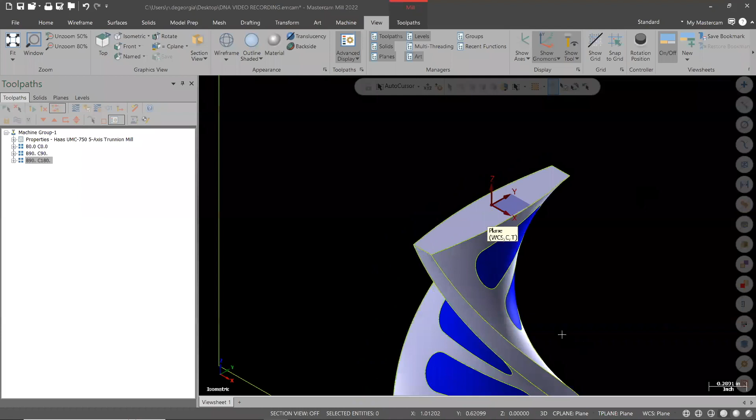Hey everyone, this video will be the last of the DNA Strand series. To do my multi-axis toolpath, I'm going to be using Unified. But first, I need to create a solid to use the clean core machining method.

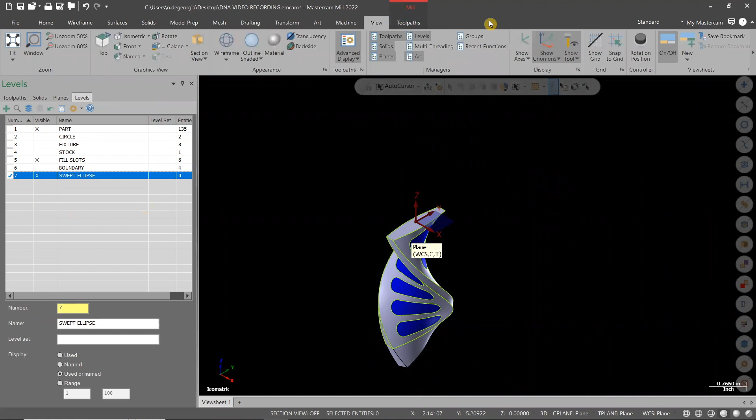To create the solid, I'm going to go into wireframe and create an elliptical on the top face. I'll have to go into wireframe, then under the rectangle tab and click on elliptical.

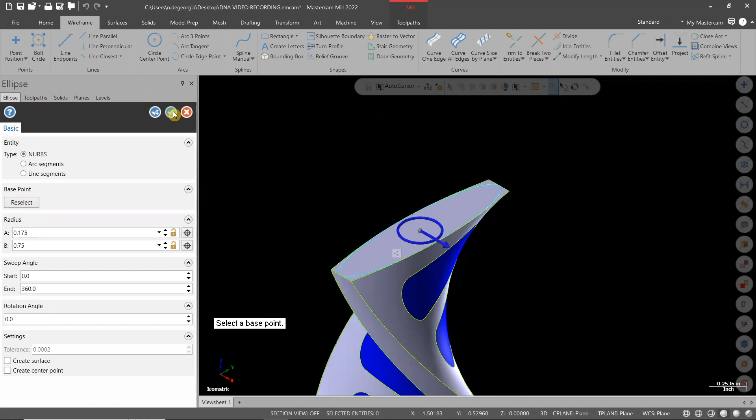Once my geometry is created, I will go under the solids tab and select sweep. I will chain the elliptical that I just created, and then I will chain the center line going down the model. That will be my along chain. And then for my guide chain, I will select a side of the model.

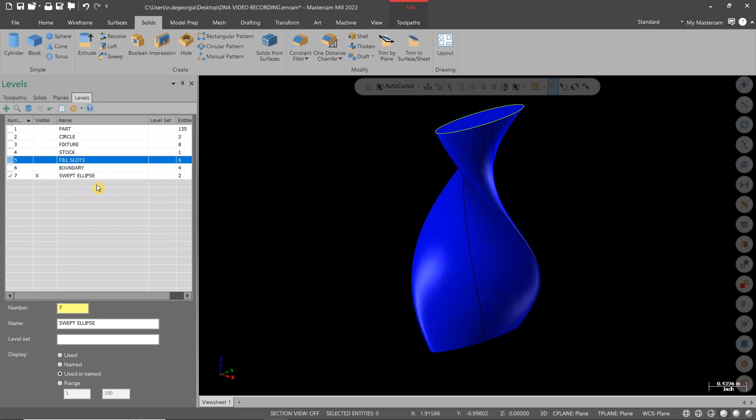Now that I have a solid for the clean core machining method, I can get into my unified toolpath. Before I do that though, I will make my stock model. I will name it the results of B90 C180 and then make sure all my source operations are clicked from my previous cutting paths.

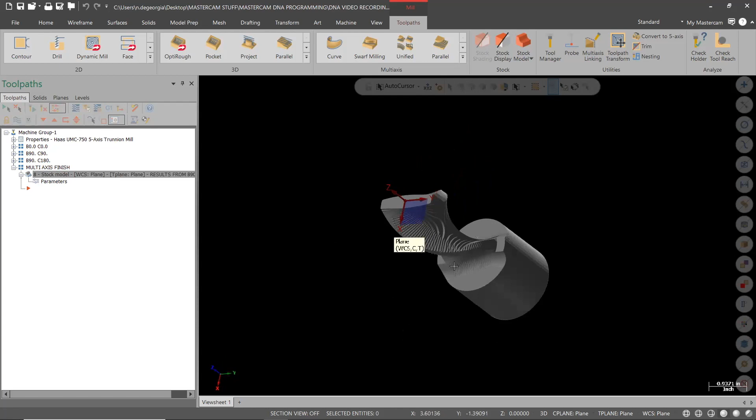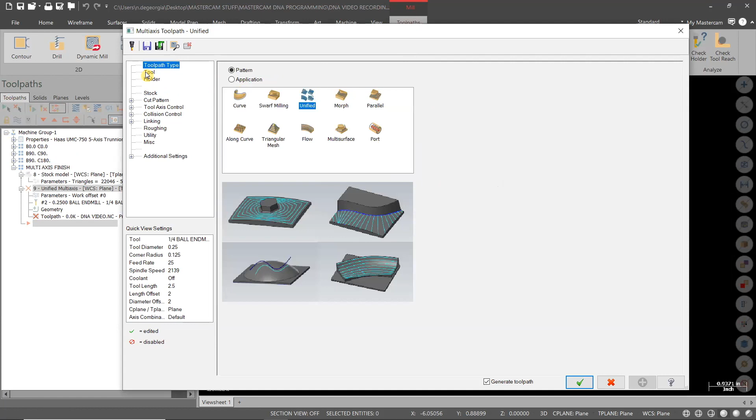Once I confirm that my stock model looks accurate, I can get into the Unified toolpath. I'm going to select Unified and then select my tool, which will be a 1/4 inch ball end mill. My cut pattern will be plane and custom angles. I will select the geometry, which will be the solid that I just made from the elliptical sweep.

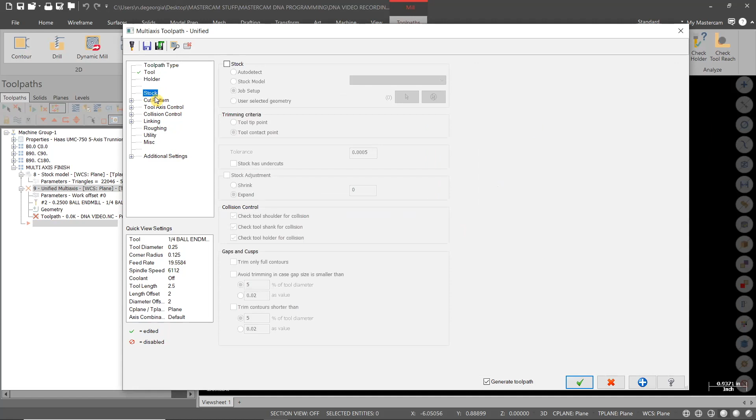I will select full start and end at the exact location, turn on extend and trim, start point and spiral. I will then adjust my step over for a scallop height of 5/10. Now you can change this number, but your machining time will take longer.

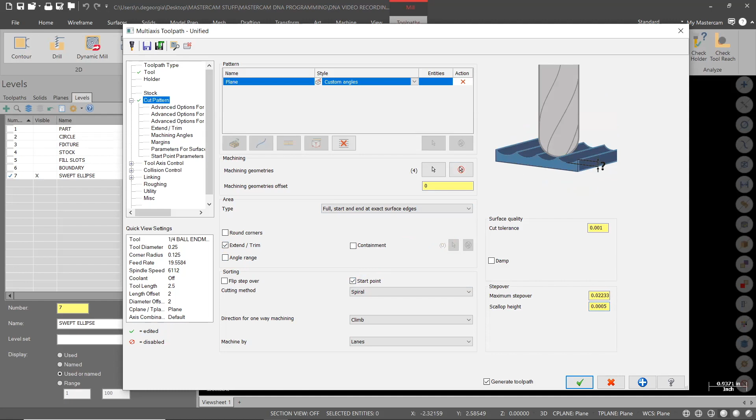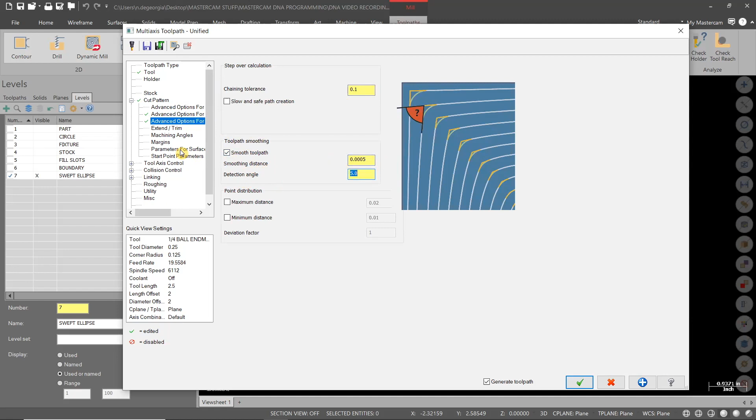Moving on from my cut pattern, I will move to advanced options for spiral machining. I will perform spiral in full and make sure that first contour and last contour are selected. Then, under my advanced options for surface quality, I want to hit smooth toolpath with a smoothing distance of 5 ten-thousandths. Extend and trim: the side extensions should be on with a value of 1/4 inch.

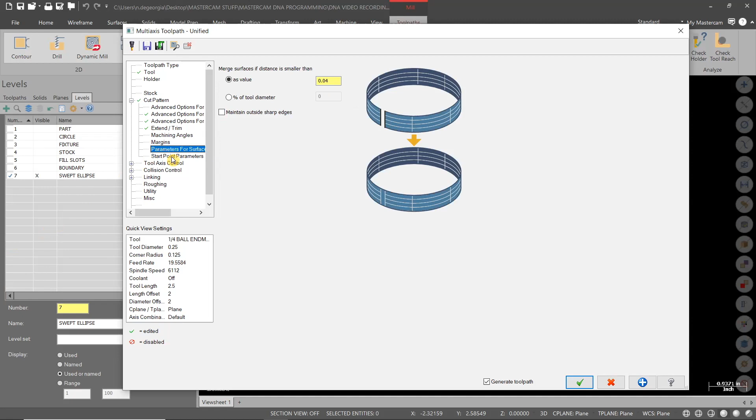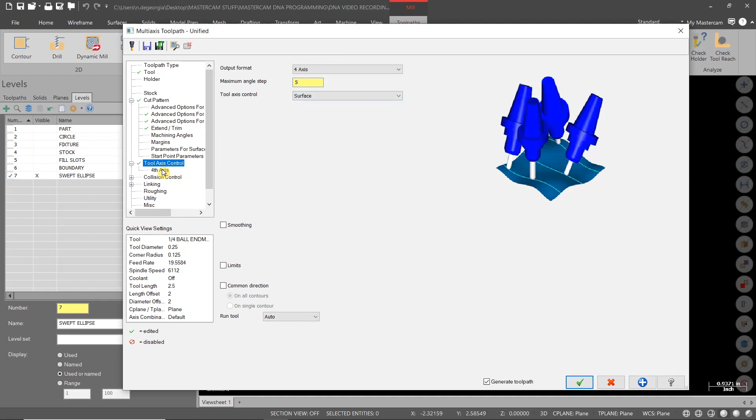And then I'm going to move down to the tool axis control. Now under my tool axis control, I want to do an output format of 4th axis, with a maximum angle step of 5, and change my tool axis control to surface. Then after, I will select 4th axis in the direction of Z axis. And I'm going to lock the 5th axis at 20 degrees.

Following up after tool axis control will be my collision control. I want to make sure that my flute is checked, then change my strategy to retract tool along tool axis. And I'm going to select avoid geometries on the right hand side of the box, and I'm going to select the model and the slots that I created.

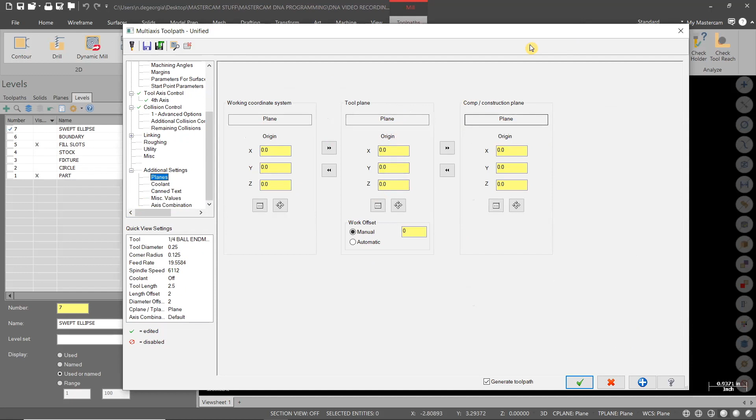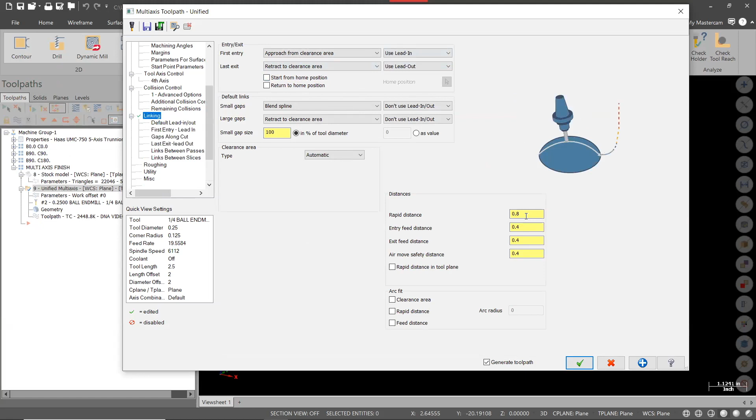After checking my tool path, I'm going to go into my linking, and I'm going to use lead in and lead out for the entry and exit. I'm going to turn on plane for clearance area and adjust the heights to 2. And then for my distances on the right hand side, I'm going to change my rapid to 1, 1/2 inch for entry feed and exit feed distances, and then an air move safety distance to 1 inch.

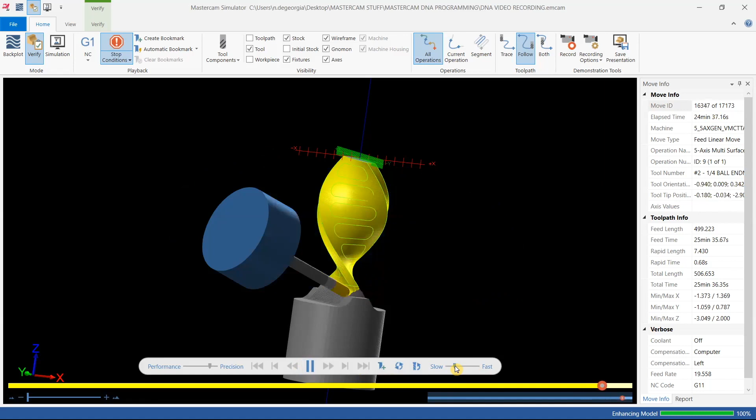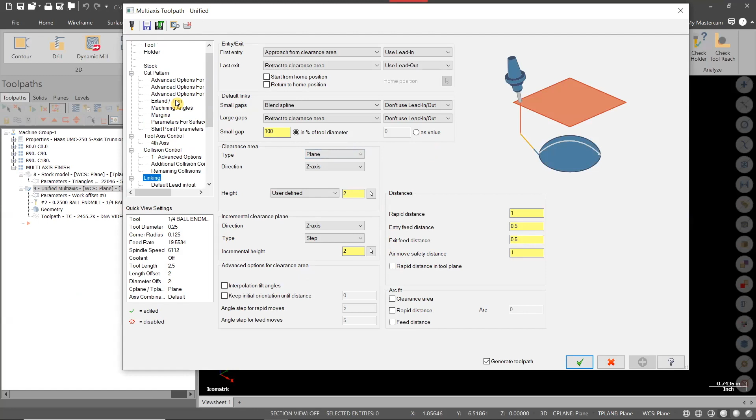After watching my simulation, I didn't like how at the bottom of the tool path it hit some of the roughed out material. I'm going to go back and change my side extensions, and then I'll run my simulation again under backplot and verify that everything looks good.

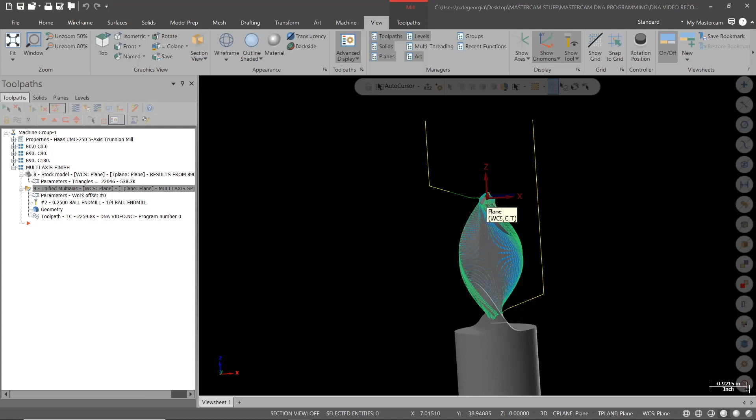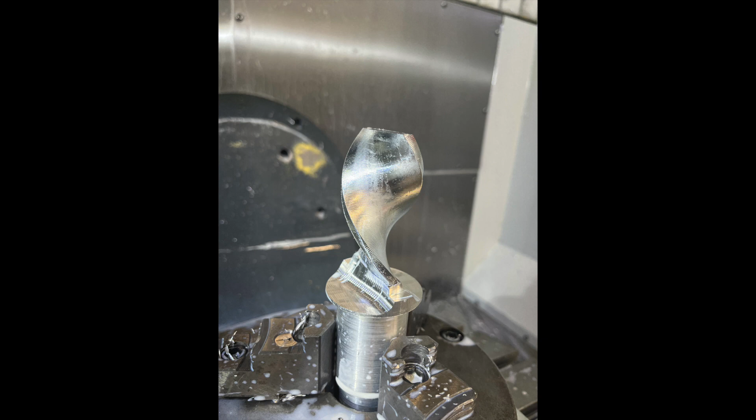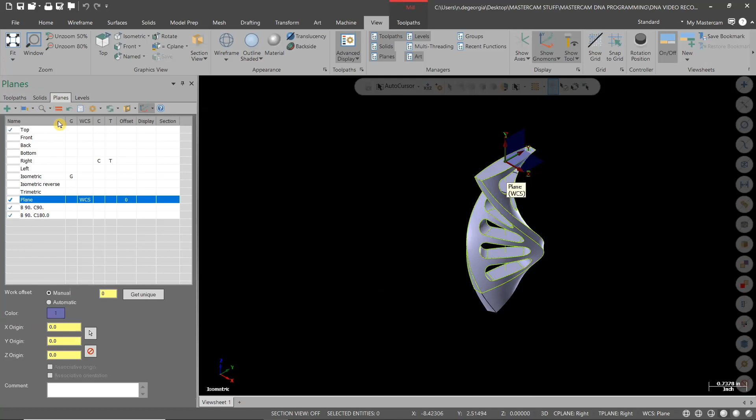Moving forward with the last operations of completing this part, I'm going to be setting up to do the slots. From here, I'm going to create a plane, and I'm going to use dynamic with geometry. First, I'm going to rotate my workpiece to the B90 C180 view, and then I'm going to select the walls of each slot. I'm going to select towards the top of the slot, so I can choose the top of the DNA strand. And then from there, I'm going to create my plane.

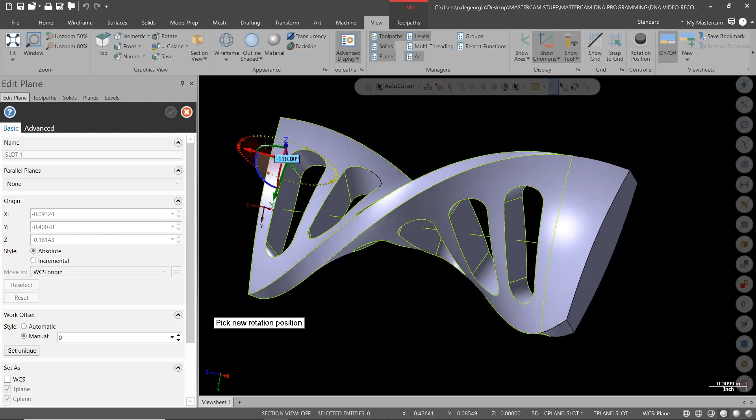Now the reason we want to use these two walls of the slot and we're creating a plane from geometry is because we need these walls to be parallel when the machining is happening. So when we select the walls, we want to choose towards the top of the geometry. And this way we can chain the top of the geometry for our cutting path.

It's also important that we go back in and edit our slot plane work coordinate system, because we want to rotate the Z to be vertical 90 degrees.

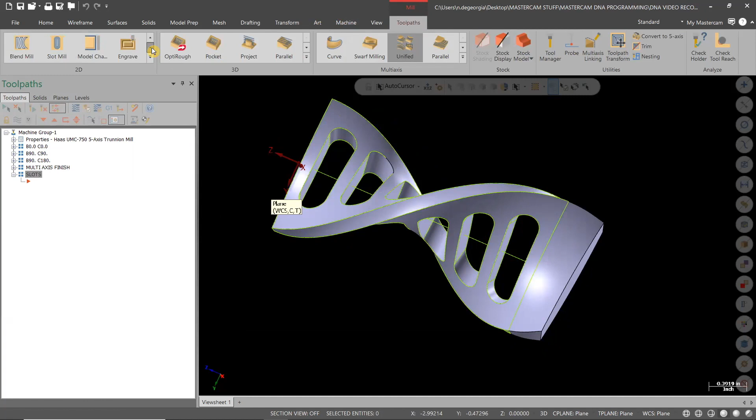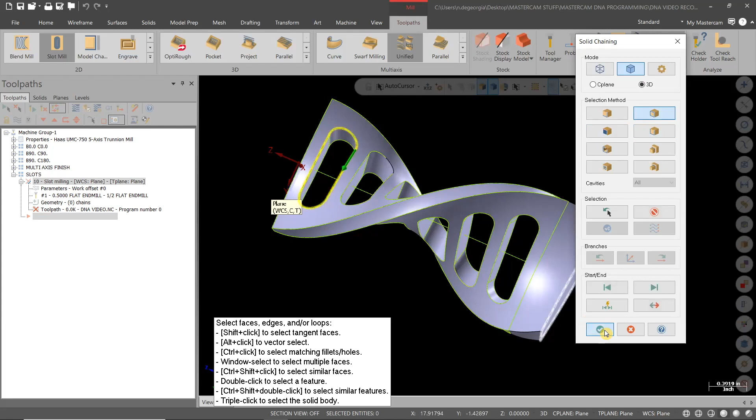Now that I have two planes created for slot 1 and slot 2, I'll go into my slot toolpath and I will chain the geometry at the top. I'm going to do a loop geometry to get it all together. Then I'm going to go through and adjust some of my cutting parameters.

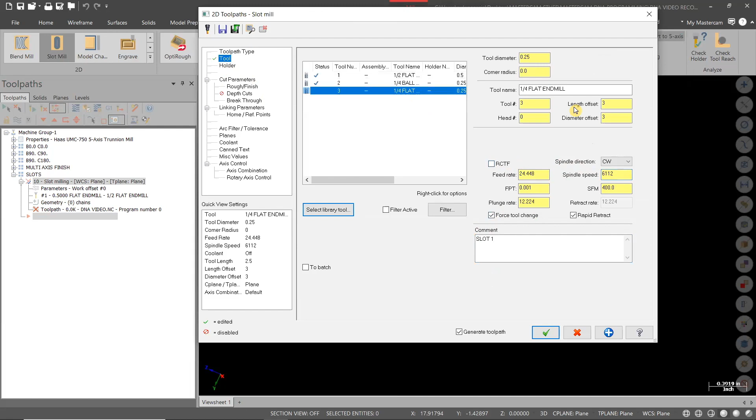I'm going to be using a 1/4 inch mill. I'm going to do force tool change, and then go through my parameters of a perpendicular entry, a 10 thou overlap, and I'm going to go into rough and finish, turn on ramp, output helixes, do a step over of 20% with a finish of 5 thou.

I am going to go in later on and change my depth of cuts to max rough at 25 thou. I start off at, I believe, 100, and it looks too aggressive, so I'm going to choose 25 thou and keep tool down. I am going to do a breakthrough of about 20 thou, and then my linking parameters, I want to make sure that everything is incremental.

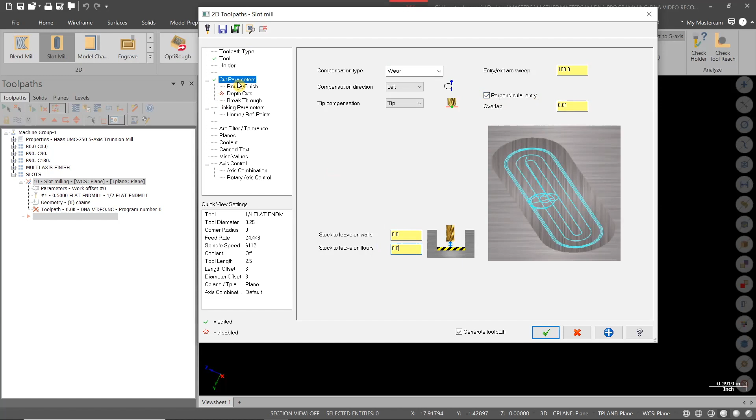I'm going to do the top stock and the depth. I'm going to select that manually and make sure, very important, that your planes are on the correct slot that you're going to be working on.